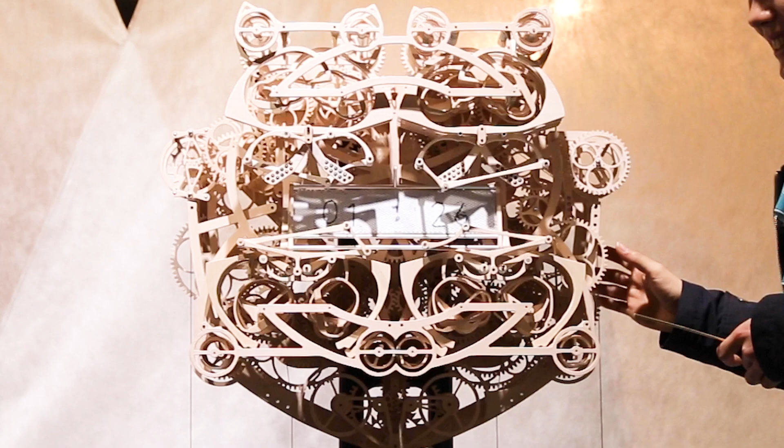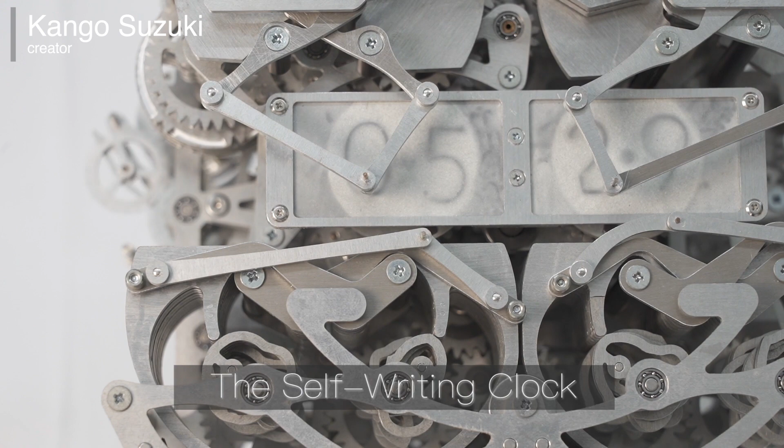Introducing modern-day mechanical value creation. This type of mechanical system has been used in Japan for all kinds of devices since ancient times.

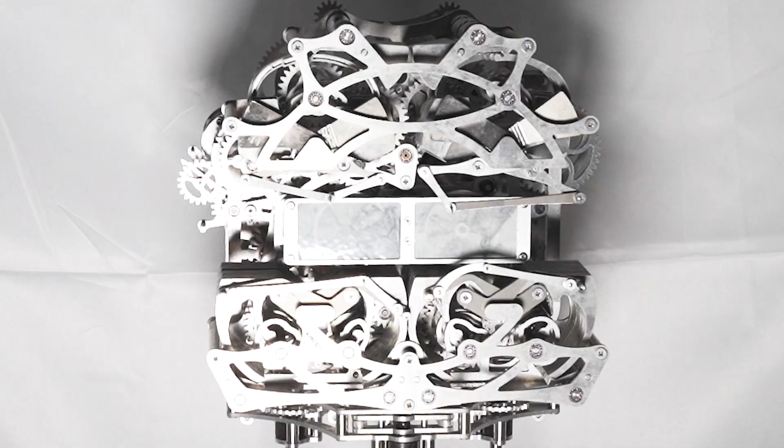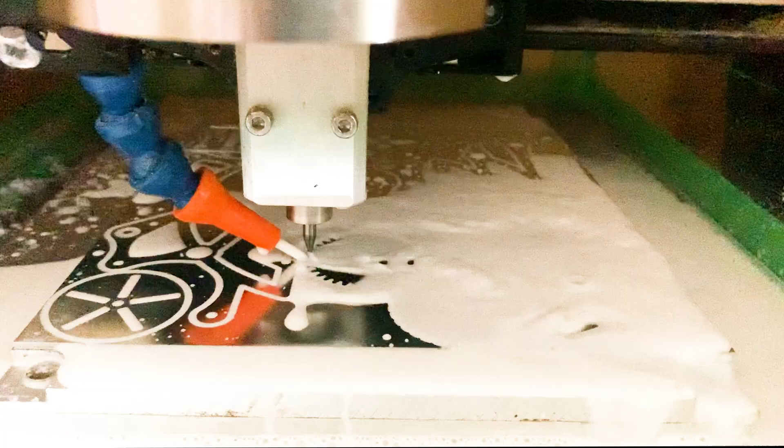This delicately complex self-writing clock was developed with a total of 3,269 interconnecting parts. To increase its durability, duralumin, one of the earliest types of aluminum, is used for reinforcement.

A low-noise mechanical governor adjusts the motions that control the writing. It autonomously controls movement speed, including rotations.

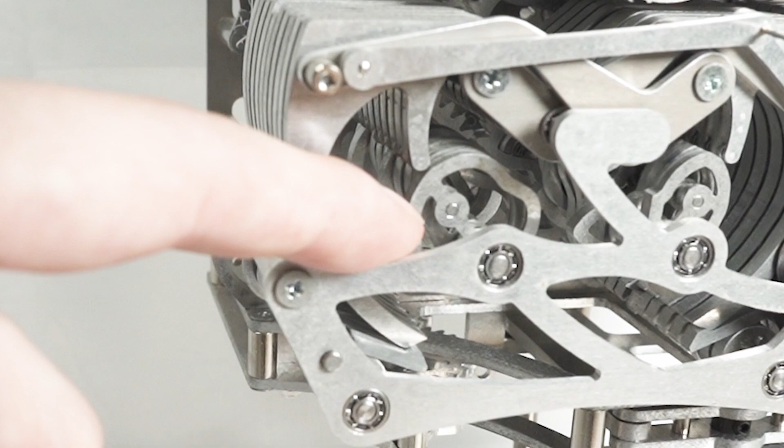What decides the pen's movements is controlled using a number of cam mechanisms. The cams join together to display full numbers on the clock.

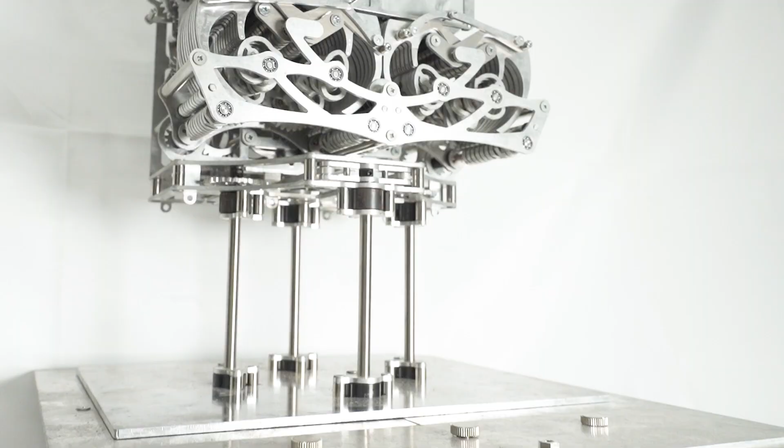This power transmission unit allows it to operate for extended periods of time. An escapement mechanism is the heart of any clock or mechanical device. An anchor escapement, such as a pendulum, allows a clock to keep accurate and even control of time.

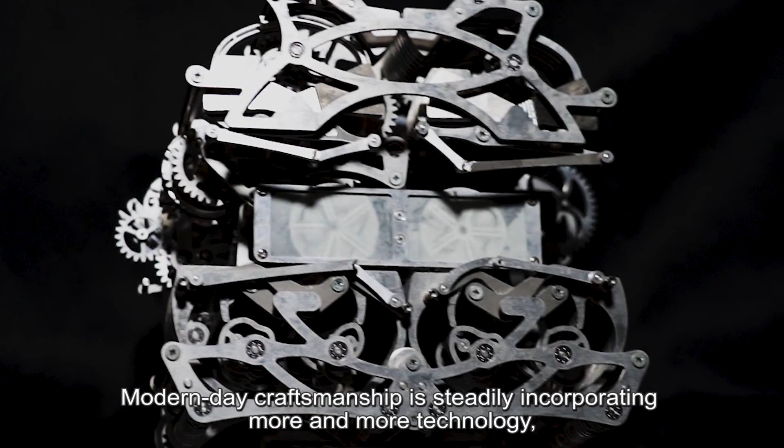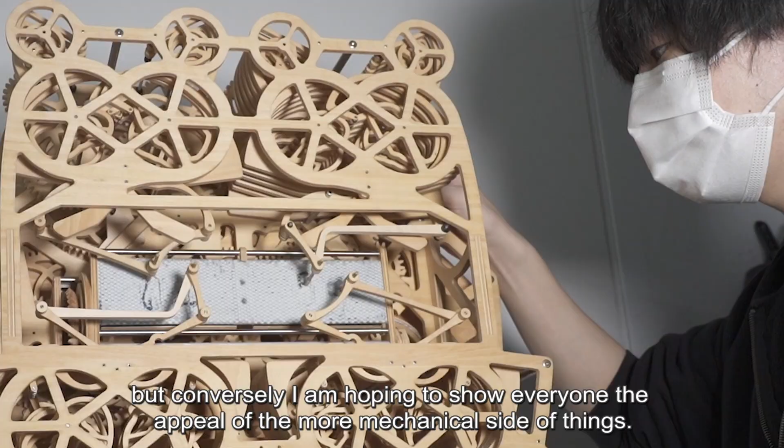Kango Suzuki, the creator of these mechanisms, is deeply involved in visualizing new and exciting ways to show off their appeal.